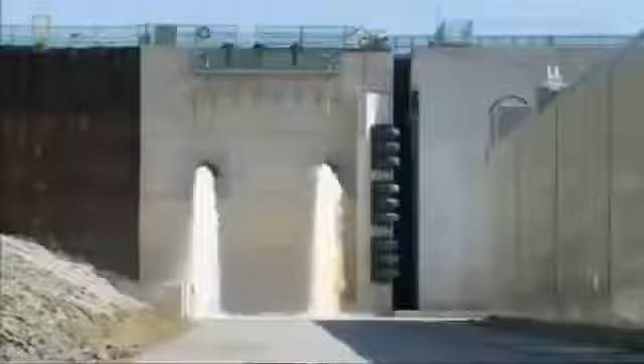Your next vacation may be spent in a paradise you've never heard of. You'll just need a way to get there. Here's the catch. That way has to go underwater. It would become the deepest immersed highway on Earth. Oh, they also have to build a couple of bridges. And did we mention the typhoons?

These tugs are towing a contradiction. A tunnel segment that's both colossal and fragile. Come back. Close. Slow down. A raft of techno breakthroughs and untested results. Bound for a place few know, to entice the world to visit. And even sway the choice for the Olympic Games.

Busan is South Korea's second largest city. 4.2 million people. Bigger than Madrid, closing in on Milan, and as hectic as Manhattan. South Korea is an Asian tiger, and Busan makes it roar. Its skyline will soon include one of the world's tallest buildings. It's the nation's biggest port, and the 5th busiest in the world.

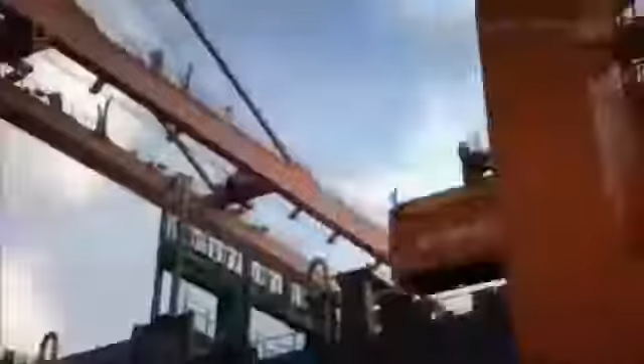Every 3 seconds, they unload a container. It's so busy, they had to build the sprawling Busan New Port. And still, Busan grows. Busan is such a comer, it's bidding for the 2020 Summer Olympics.

But Busan has one big problem, and it's on display here at one of Asia's biggest fish markets. Dozens of vendors cram in here, 14 hours a day, every day of the year. And that's the trouble with Busan. It's so crowded, it's running out of room.

The solution to Busan's problem lies just across Jinhae Bay. Geoje, an island 7 times bigger than Manhattan, but just 1/8 of Manhattan's population. Busan, Geoje. Busan, Geoje. Geoje is a gold mine of development, a potential Korean Riviera, with room for Olympic athletes to hit their stride, and for the Korean tiger to stretch its legs.

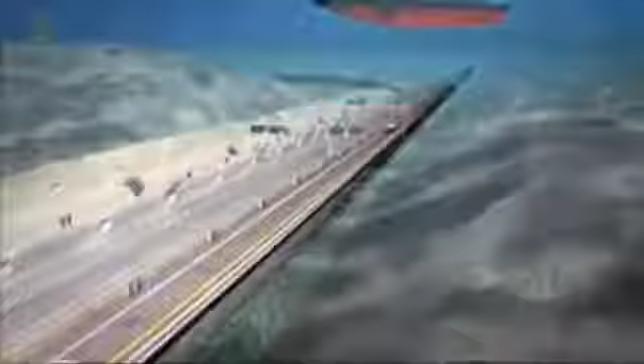Plunging 48 meters below sea level, the link will boast the deepest immersed roadway in the world. The tunnel will be composed of 18 mammoth segments, each as long as 2 football pitches and as heavy as an aircraft carrier. Wide enough to carry 2 lanes of traffic each way, with an access tunnel between.

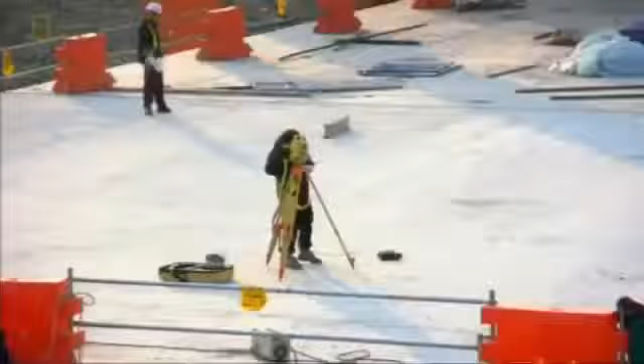That's the concrete reality. Now, here's where it gets dicey. Each segment has to be carefully towed into position, then carefully sunk to the seabed. And all the segments have to align within 35 millimeters, less than a thumb's width. Weather adds its own demands. This site is exposed to the open sea. There are always high waves, and the water is deep as well.

It is wide open to the Northwest Pacific Ocean, so we have extreme exposure conditions for the construction period. So we've got to be ready for whatever that sends us, like big swell waves, strong winds, and even the occasional typhoon. Building a tunnel like none ever seen will take techniques like none ever tried.

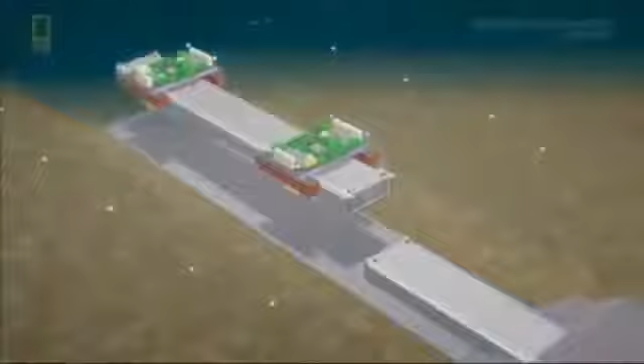Yet the Koreans have never built an immersed tunnel. But this country has. The Dutch have 5 centuries of experience at holding back the sea.

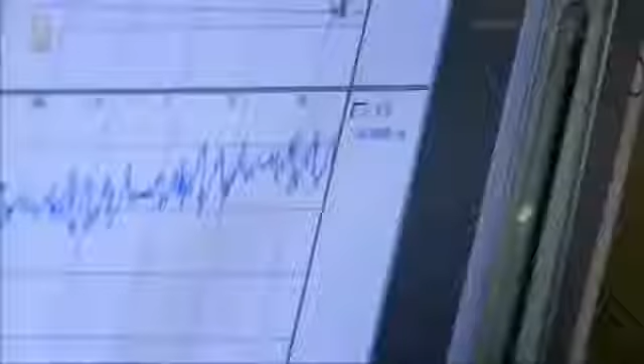The Dutch company had a zest for a challenge, and the confidence that they could solve these problems. And so we were able to trust each other. That's how we ended up working with the Dutch. This is what confidence looks like.

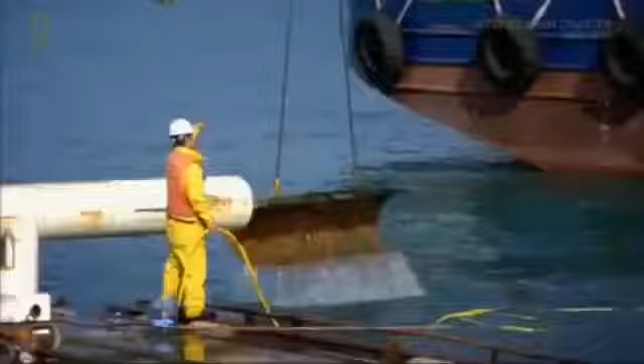Construction begins with the tunnel entrances, one on Gaduk Island, the other near an uninhabited island. From here, engineers will dig down to 12 meters below sea level to meet up with the undersea tunnel segments. But they won't tunnel through the seabed itself. If they did, the gradient would be too steep for driving. Instead, Peter's crew will lay prefabricated tunnel segments on the seabed.

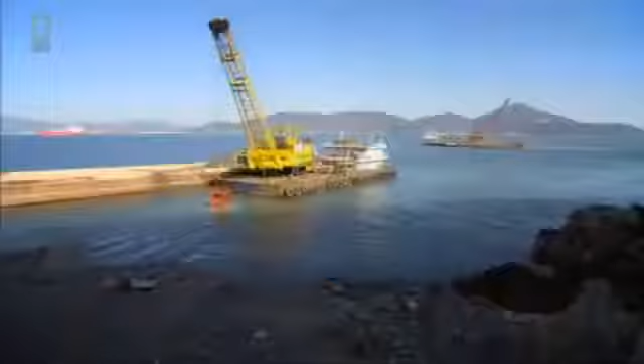First, engineers dredge a trench where the tunnel will rest. To buttress the foundation, they bore concrete columns into the seabed, stopping 3 meters shy of bedrock. The reason? Earthquakes. Avoiding bedrock will give the tunnel crucial flexibility. The segments will rest on a bed of gravel to ensure an even surface.

Because the bed determines the exact height of each tunnel segment, the gravel must be placed with pinpoint accuracy. Later, the entire tunnel will be covered with thousands of tons of crushed rocks to protect it from collisions with ships or anchors.

Because the tunnel segments will be prefabricated, the first challenge is finding land for a construction yard. Not an easy task in Busan. If you look around, there's not a single metre of flat land anywhere that a contractor can use as a base for the construction period.

From the tunnel site, the closest spot lies 35 kilometres away. It's big enough to build up to 5 tunnel segments at a time. Each segment weighs about 48,000 tonnes and is made of 8 subsections, each twice as long as a London bus.

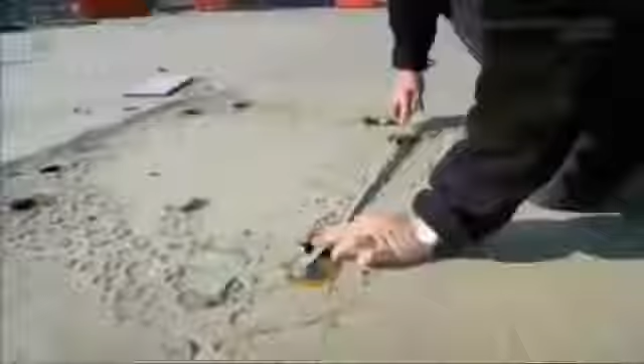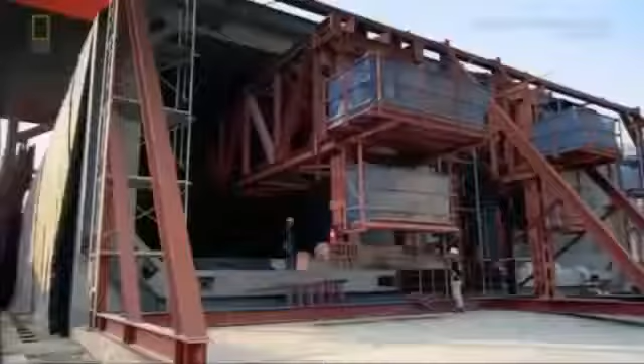Anyone with a basement knows water can penetrate concrete joints, potentially disastrous in an underwater tunnel. But each giant section is cast without a single joint, thanks to Korean ingenuity. We continuously poured full sections from the ground up to the top of the walls to eliminate gaps in the walls.

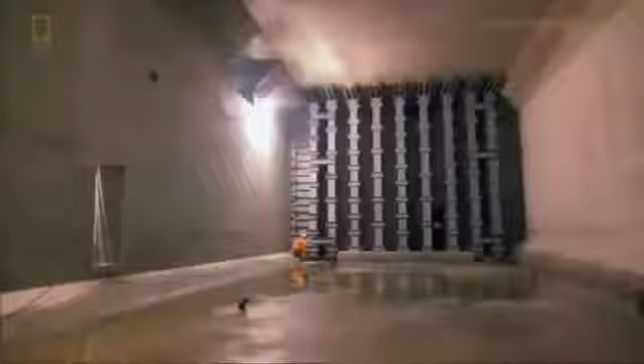A process lasting 24 hours. After casting, the ends are sealed with steel bulkheads, a Dutch innovation best appreciated later on the bottom of Jinhae Bay. The bulkheads are watertight because these babies are about to take a bath.

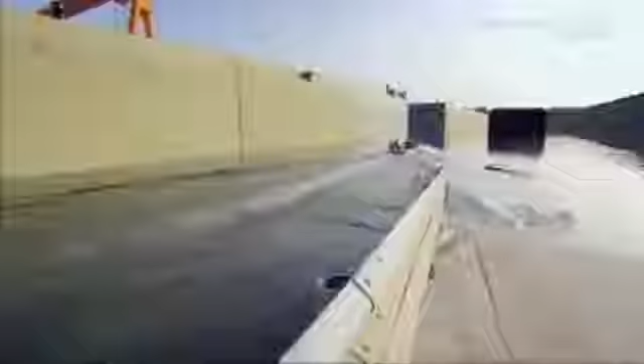Flooding the dry dock will allow them to float the segments out to sea. The inundation of the dock takes approximately 48 hours. During the first phase, we let in water until it reaches the level of the bulkhead door. Then we'll check to see if the bulkheads are leaking. Once all the leaks are repaired, or if there are no leaks, we'll fill up the dock completely. It's enough water to fill 230 Olympic pools.

So how do you prep 48,000 tons of dead weight to float? Inside every tunnel segment, there are 6 ballast tanks, and they're filled with water.

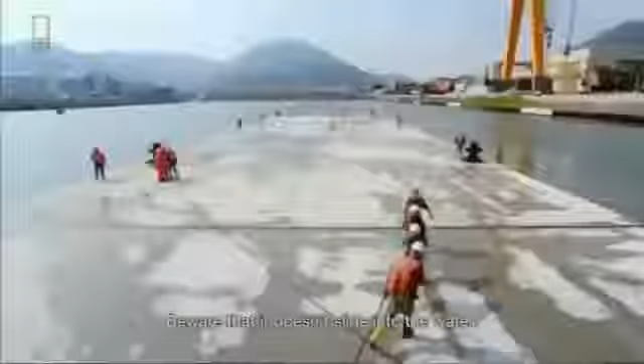With barely 2 meters on each side, there's no room for error.

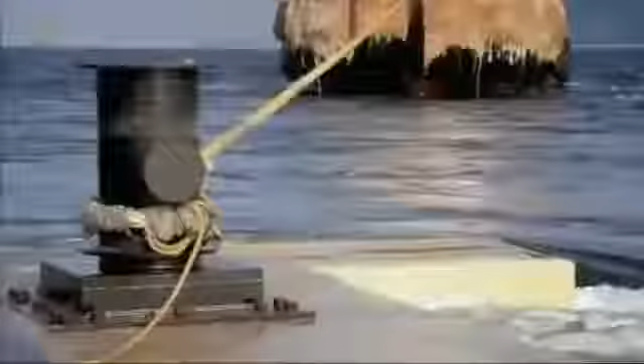Believe it or not, clearing the dry dock was the easy part.

While work continues on the undersea tunnel, the rest of the Busan Geoje fixed link starts to rise: 2 giant bridges, one with 3 pylons, the other with 2.

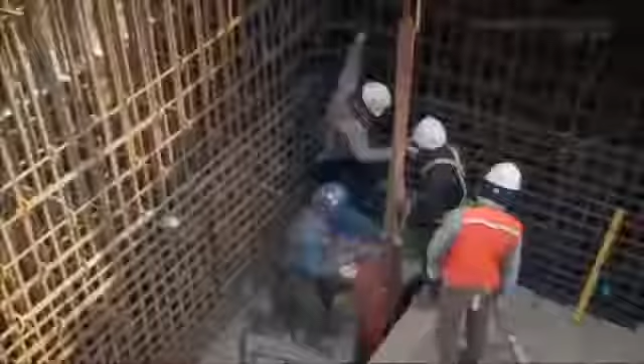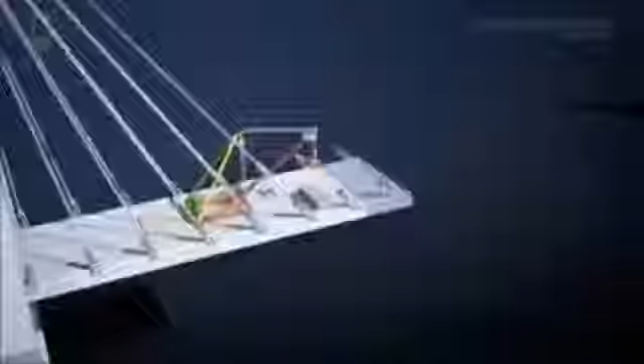At its topmost, the 2-pylon bridge will soar 156 meters above sea level, the height of a 50-story building. The span between the pylons will stretch the length of 5 football pitches, with enough room for the tallest freighters to pass under. Crucial for a city that thrives on shipping for its livelihood.

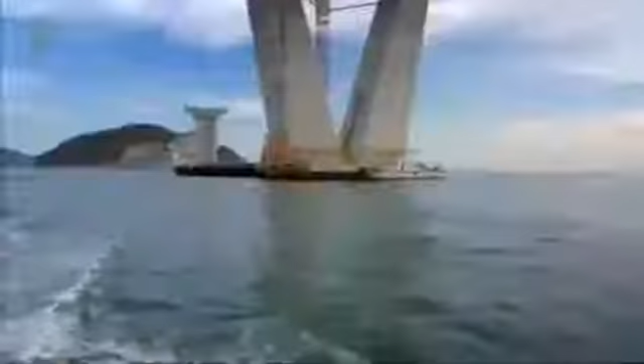The most pleasing aspect of the bridge is also the most daunting: its curved diamond shape. Curved pylons are very difficult to construct, but they're very much in harmony with the surrounding scenery, bearing resemblance to a mother's praying hands and to the wings of seagulls.

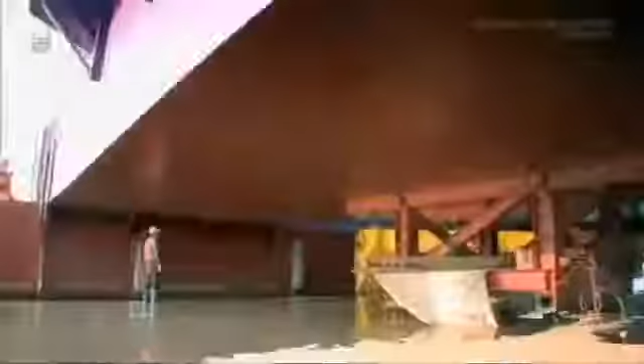35 kilometers away, the first five tunnel segments arrive at a temporary mooring site. From here, they'll travel across Jinhae Bay to their resting place on the sea floor, already leveled and lined with gravel. Pontoons the size of a mansion, Dutch designed, Korean made, are positioned near each end of the tunnel segment. After arrival at the tunnel site, mammoth winches on the pontoons will lower the segment to the seabed. At least, that's the theory, because it's never been done in the open sea.

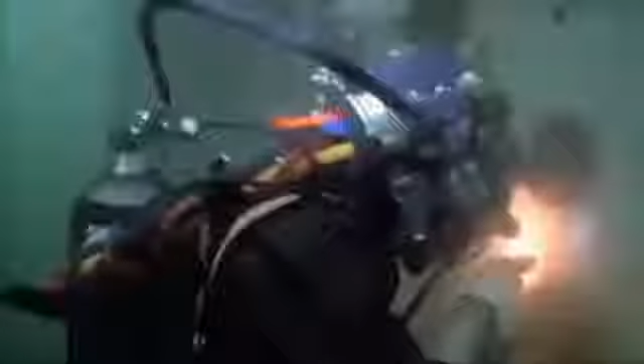A specialist diving team prepares the first tunnel segment for the immersion operation. Divers test connections for data systems and power supplies, standing by, and remove marine growth from the bulkhead. Finally, they install steel wires underneath the tunnel segment, crucial for positioning during immersion. In a good position now, they come up on the wire.

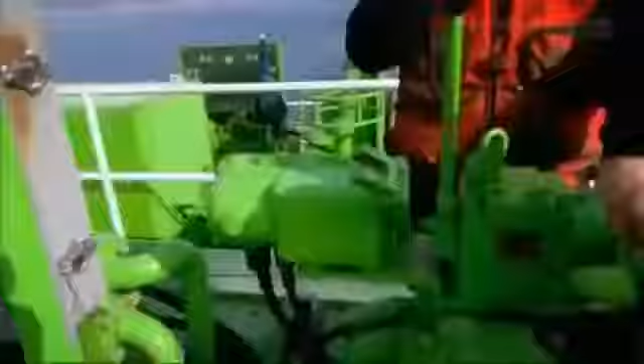Above water, the crew also add a temporary access tower, so workers can enter the segment in case of trouble with the ballast tanks. Every problem has to be anticipated, because if things go south, they won't get a second chance. What we do doesn't have anything to do with luck. We know what's involved, we know how the process works, and we have the feeling we control the whole process. Not quite.

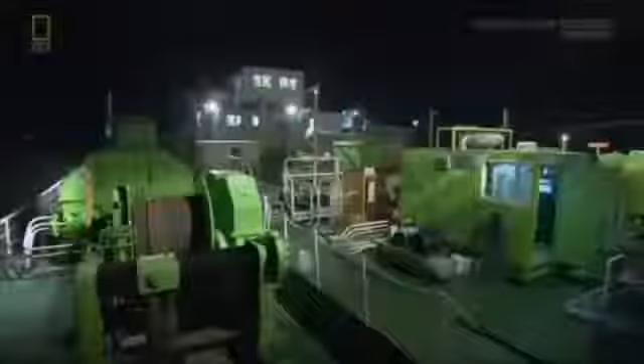Back in Holland, the rest of the immersion team stands by to fly out. In all, 56 men wait for Peter to say go, and he's waiting for a forecast.

When the wind blows from the south, swells roll in from the Pacific. Because the site is situated offshore, they have to deal with waves, and these waves can be pretty fierce. Even swells barely 30 centimeters high pack so much force they could fracture the subsections that form the tunnel segment. Throughout its journey, the segment will be at the mercy of the waves, so the team needs three days of calm seas.

Strukton looked around for a forecaster, but few dared to stick out their neck for such a costly guess. Then a Danish company seized the challenge, coming up with a model to predict waves as small as 10 centimeters, up to five days out. A stunning breakthrough in forecasting.

That means we're able to say tomorrow we can do an immersion, and that means we're able to put people on the plane yesterday, really on a last-minute basis. It takes away a big risk for us and for our client.

We've got the weather, they're all showing the same prediction. The swell still isn't as bad. I would say we have a go. Green light. We'll try, then we'll try, right? Okay, thank you, yes, bye-bye.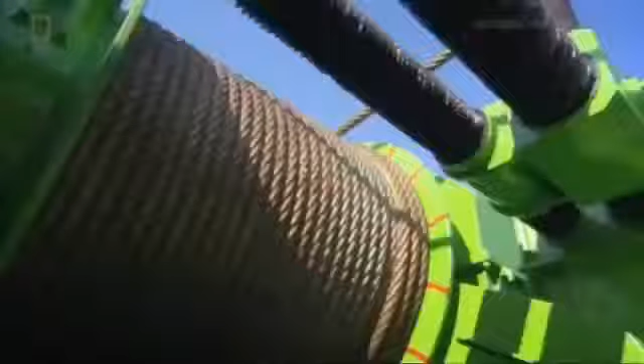Ahead lie 48 hours of tension for the boss. Six months of work ride on steel threads, and a forecaster's guess. Tonight, no one will sleep soundly.

After a cautious voyage at 3 kilometers an hour, the first tunnel segment arrives at Gaduk Island, the starting point of the tunnel. Joining Peter is the elite team fresh from Holland, among the few men on the planet who can do this job.

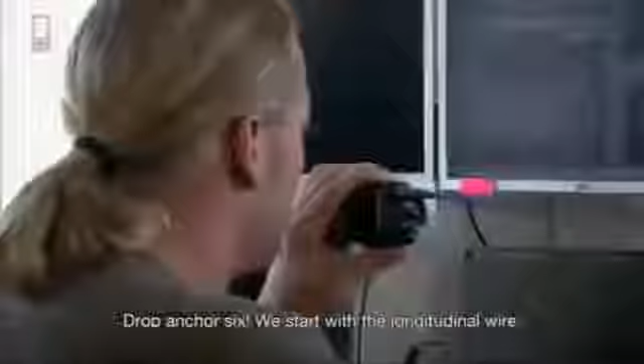But working along shore poses a huge challenge. 48,000 tons have to be maneuvered into a slot with just one meter of clearance underwater on each side. One false move and the segment could get jammed in the rocks. Controlling the segment are 14 steel cables, anchored in the rocks and on the seabed.

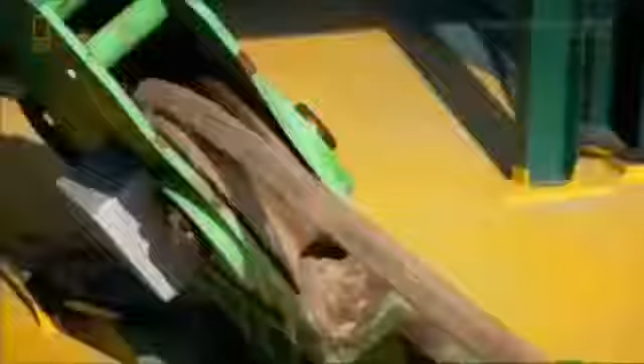Aligning the segment takes painstaking accuracy. Surveyors take readings using a system of prisms and mirrors mounted on the access shaft and the survey tower. It's all new to the Koreans, so it takes time getting used to the technology.

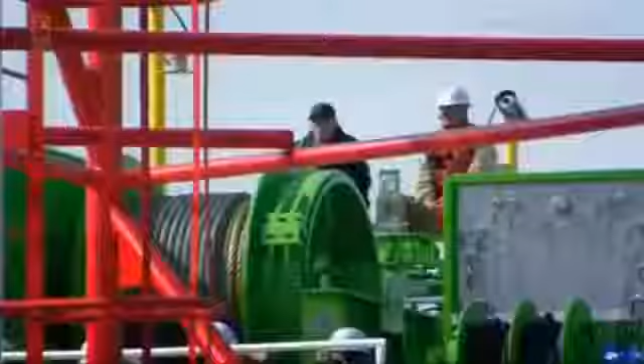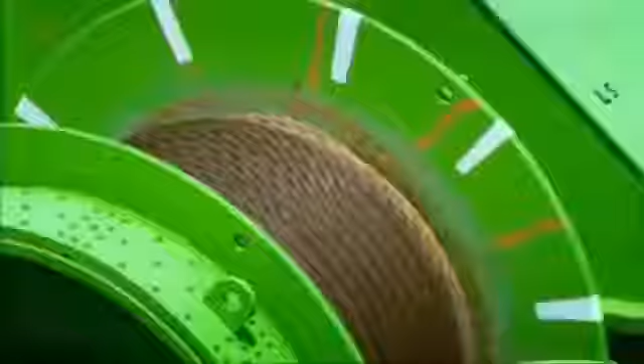The ordeal will take all day and end either with an engineering triumph or a 48,000-ton disaster. With so little clearance and so much at stake, the segment moves at a snail's pace. After a journey of 35 kilometers, it's now just 4 meters from the abutment.

We've worked really hard for a half a year to prepare for this moment. 56 of our people are here to execute this operation. The Koreans are excited and tense because they've never witnessed this. We've done it more often, but still, a very special moment.

Till now, steel plates have protected the leading edge of the segment. Behind them is a component as crucial as it is fragile: a rubber gasket to ensure a watertight connection with the abutment.

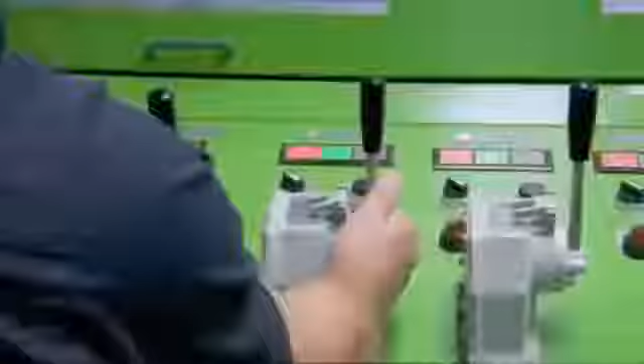Now they're ready to begin the descent. Operated by remote control, the ballast tanks slowly fill. The command post monitors everything via remote control cameras, on the pontoons and inside the tunnel segment.

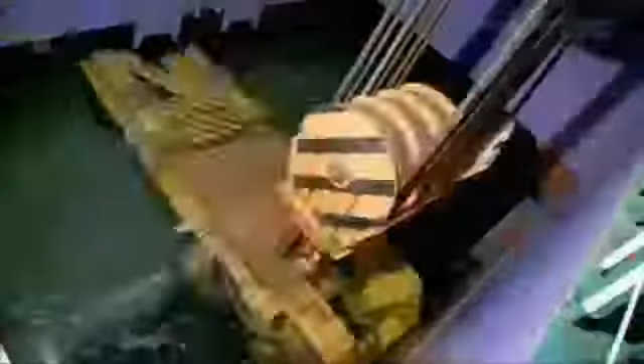7 hours later, touchdown. The segment now rests just 50 centimeters from the abutment, the mouth of the landward tunnel. To close the gap, engineers have installed a pair of powerful hydraulic jacks. Linking the jacks and applying tension closes the gap.

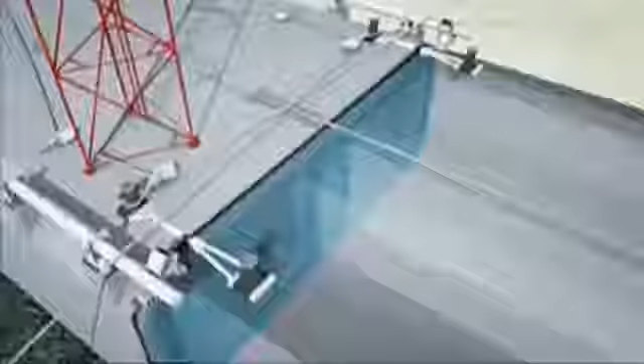The final stage begins from the landward side. A wall of water nearly 3 meters wide separates the segment from the abutment, what they call the immersion joint. Opening this valve will force the water out.

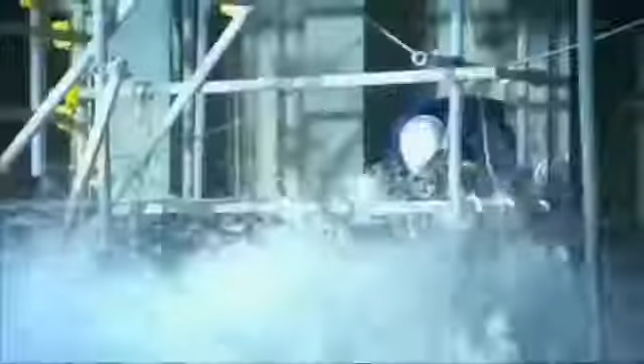As the immersion joint empties, external pressure will further compress the gasket for a watertight seal. The echo from the bulkhead reveals the water level in the joint. With the water drained, they can open the bulkhead door.

But the lock's jammed. You know that he was going to break? Did you know that? Because you took a toolbox with you.

This calls for cruder technology.

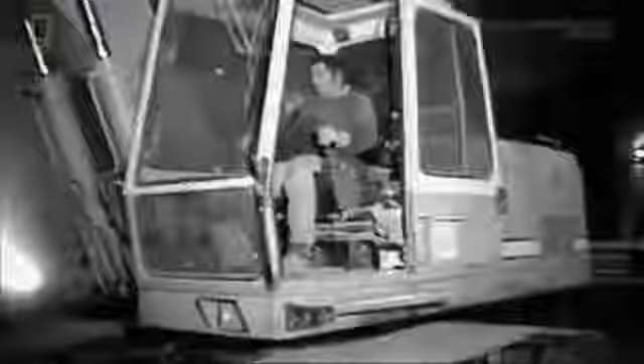All that stands between the crew and the first immersed segment is the steel wall installed back at the dock, and here is why it's so brilliantly simple. On other tunnels, engineers seal the ends of segments with concrete, then knock it out after immersion. But that takes time and creates debris. The modular steel bulkheads are easy to install, easy to remove, and they'll be reused on every segment and eventually recycled. Faster, cheaper and safer. An engineering trifecta.

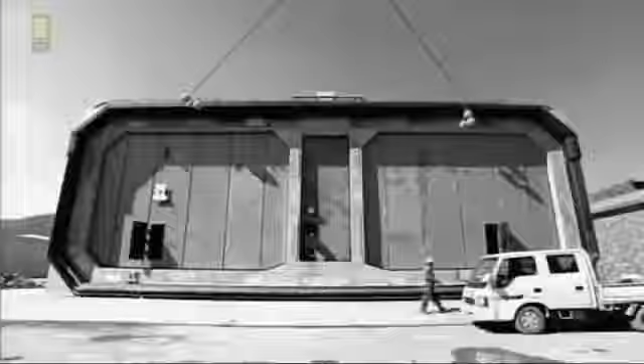Finally, open sesame.

Although we experienced some unexpected things, we were very happy that it was completed successfully in the end. And the feeling of accomplishment was indescribable.

Their marathon operation lasted almost 78 hours. Some have gone 2 days without sleep. One down, 17 to go. And they won't all go smoothly.

Like the Busan tunnel, the bridges advance in segments, but 2 at a time, not 1. It's called balanced cantilever construction. Working outward, steel segments are laid on each side of the pylon to keep the bridge in balance.

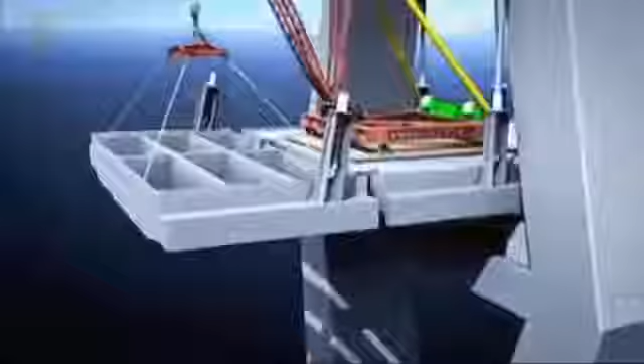Then 2 cables are attached to brace the segments. Once they've done that, the derrick crane then lifts up 6 precast concrete panels and places them onto the steel frame. Then put a final post-tensioning into the cables.

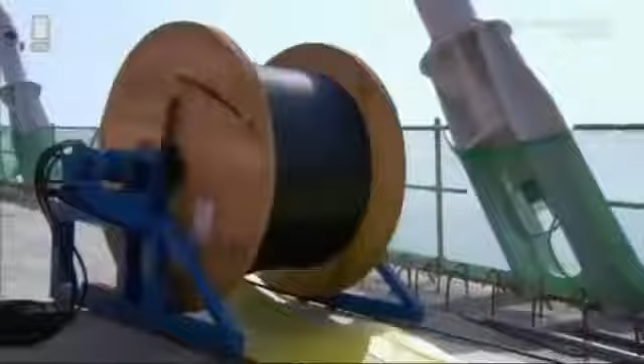And we're ready then to start the whole thing over again.

Back at the tunnel, the team have installed 12 concrete segments. But now they're heading for 48 meters, the deepest water and the hardest challenge.

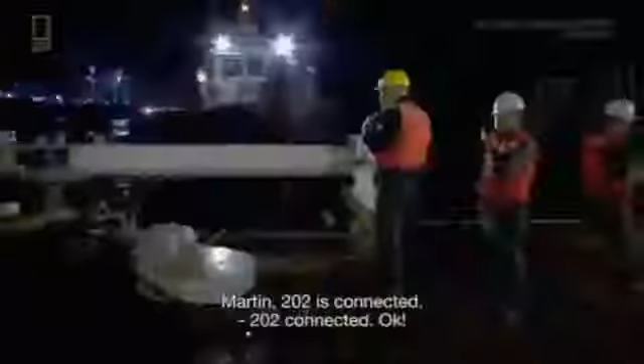New hurdles demand new techniques.

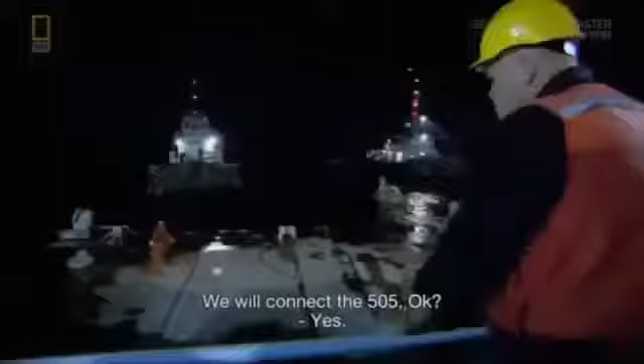The sea floor out here is soft clay, so they need to set anchors that can hold the segment and pontoons fast.

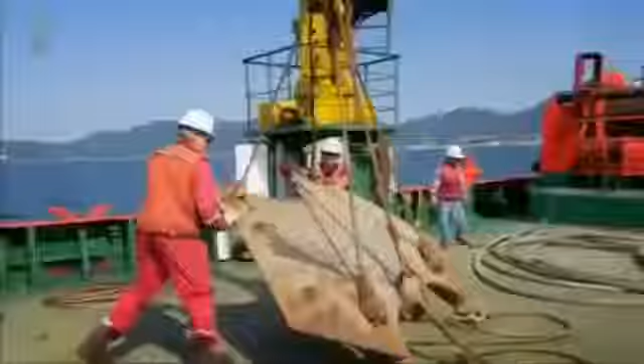Stevmantas, named for their fish-like shape.

They're designed to dig in where other anchors lose their grip. Once segment 13 arrives here, 14 steel cables connected to the anchors will hold it in position.

But once again, deep water raises the stakes. Once the segment hits the bottom, suppose a problem arises with the ballast tanks. Somehow, Peter would need to get the engineers inside.

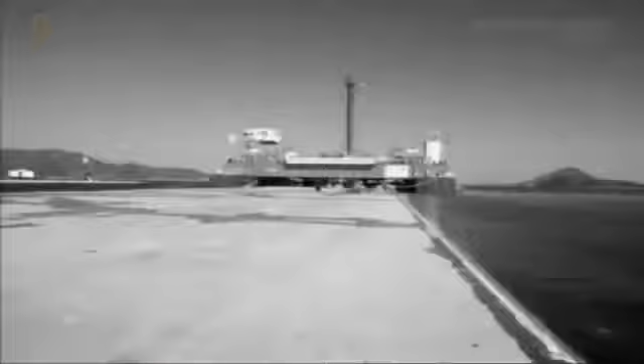On segment 1, they could use an access tower, but not in deep water. The solution is a first in tunnel immersion: a self-propelled diving bell. Purchased in America, the sub was refitted just for this project.

I'm coming down to 15 meters, see if we can get the tunnel on sonar. This is the tunnel element here. That's something probably a bollard on the corner.

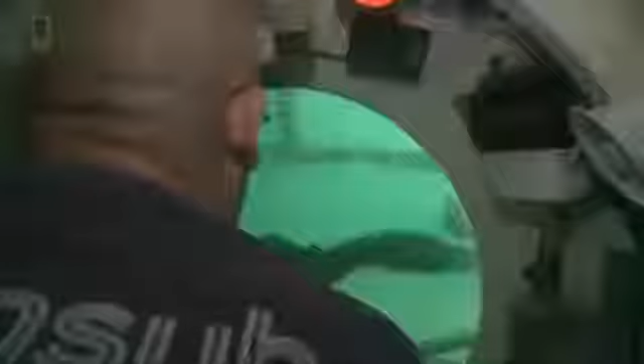With a little boat like this that can go to 300 meters, you've got the concept of a ferry transferring people to the tunnel segment. It's 9 meters long, with room for a pilot, co-pilot, and 5 engineers. It can dock on a landing tower on the segment for watertight access to the tunnel.

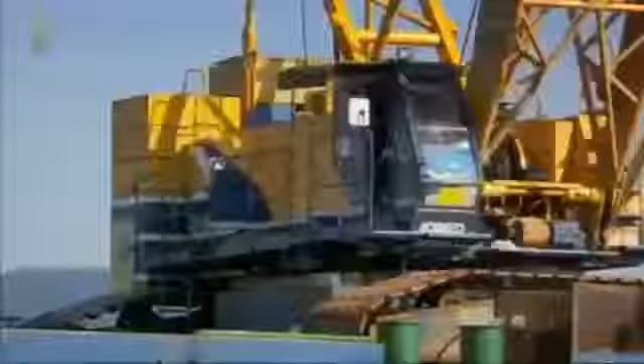Deep water poses another problem. Monitoring the position of the segment as it's lowered, because one misalignment would be disastrous. To calibrate the position of the first segment, surveyors took readings from prisms mounted on the access tower. But remember, there's no access tower here. So once more, the Dutch devise a smart, simple solution. It's named for what it is.

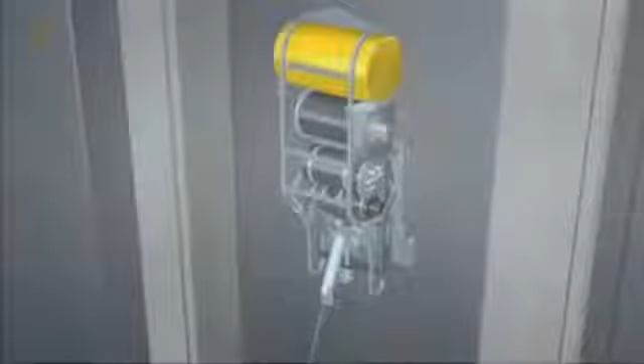A taut wire. One end attaches to the leading edge of the segment to be immersed. The other end attaches to the previous segment. The taut wire ensures the connection stays under high tension. Positioning the device is a delicate operation. This custom-made model is the only one in existence. Breaking it is not an option.

When this segment descends, a computer will record the length and angle of the wire, allowing the team to monitor the segment's position. The taut wire is now under high tension between this segment and the previous one. And as the segment descends, the wire automatically retracts and becomes shorter. So that provides us with exact positioning data.

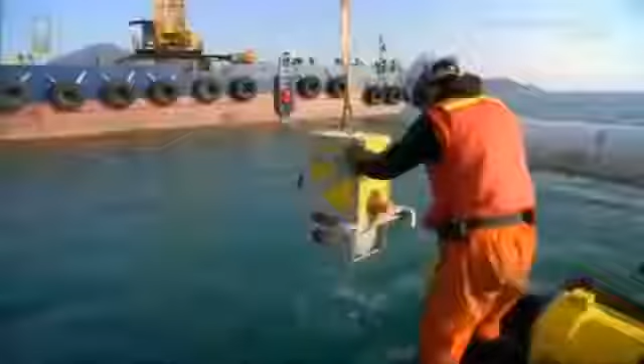To fine-tune the position of the segment on the seabed, 4 of these sensors are attached, one on each corner of the bulkhead. Another custom innovation for this project. And wait till you see how accurate they are. The whole operation is remote controlled from the command unit on the pontoon. With one click, they start filling the ballast tanks.

You can feel the tension building up now. And then we all have one question. Can we do it again? Can we get it in position? It's the same tunnel, but it's farther away from the coast. It's deeper, the weather, everything. So many aspects make it different every time, so you have to stay alert.

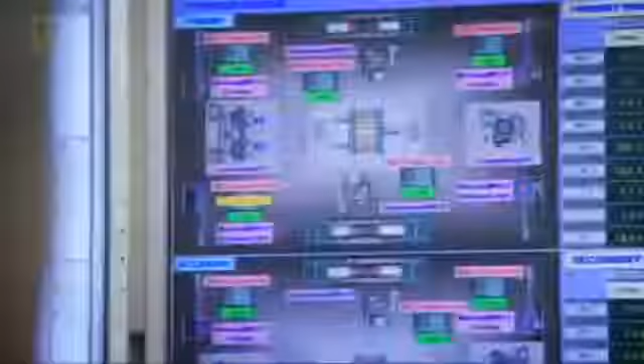All the data feeds into Peter's computer and refreshes the position of the segment every second. This is the tunnel where we have to go to. The green one is the final position, and this is where it is now. So you can see it's just below sea level.

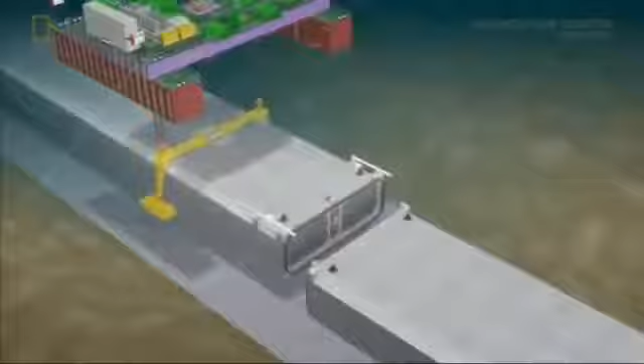At this stage, where the tunnel is just a few meters underwater, there's no problem. We can still move in any direction. Nothing can hit it. But when we're approaching the segment that's already on the bottom, then I have very little clearance, so the steps I make will be a lot smaller.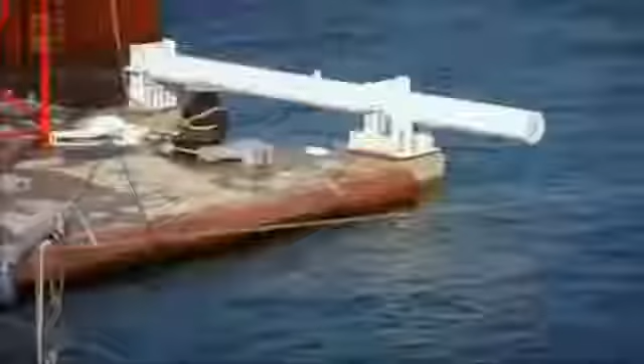It takes 9 hours to descend 48 meters, just 9 centimeters a minute. The first step in joining the segments poses another challenge and another solution. The moment a tunnel segment approaches the one ahead of it, it's moving because of the swell. So we install 2 guide beams on the top end of the segment. Another simple but elegant solution.

The moment we pull them closer together, the guide beams become less flexible. The movement diminishes until the segment is motionless. With only 50 centimeters separating the segments, and in near zero visibility, a diver connects the hydraulic jacks. The segments seem aligned, yet the slightest error on this end will translate into a big mistake at the other. But the Dutch don't miss a trick.

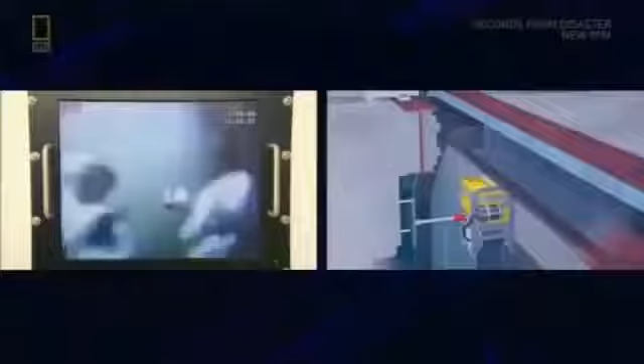The 4 remote-controlled sensors on the bulkhead now deploy. They measure the position of the segment within 1 millimeter, the width of a guitar string, and relay the data back to the command center. Peter needs to shift 48,000 tons of concrete, 20 centimeters to the right. Even on calm days, the swell is so heavy and the segment is so long, stability is a problem.

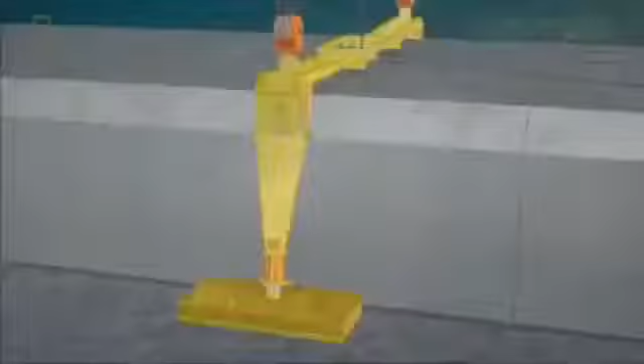The solution? The External Positioning System, or EPS. Yet another Dutch invention based on a simple idea. A pair of hydraulic legs and extendable feet to hold, lift and move the segment. Connecting each pair of legs are 4 steel cables, already installed back at the mooring site. Braced on its robot legs, the EPS laterally aligns the segment into its correct position. Now, the jacks are tightened by remote control, compressing the rubber gasket.

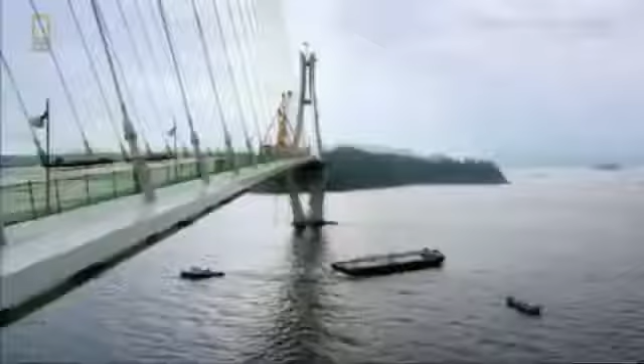Done. One more segment, complete. Like the tunnel, the bridges approach the final stages. Before the 2-pylon bridge can accept its last section, engineers have to perform a stretching exercise, as tiny as it is powerful. Both pylons have to be pulled back about 7 centimeters to create enough space for the key section to be placed.

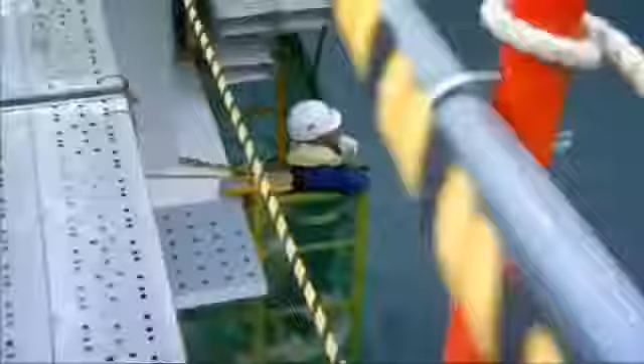Once the tension is released, the final section will have a tight fit. After 6 years, they must be eager to finish. But just like the tunnel crew, they have to move in baby steps. Because this baby is a giant.

A few kilometers away, Peter's crew prepares to install their last segment. Just like the first segment, number 18 has to be maneuvered between rocks. As before, they run some of the anchor lines from the pontoons to the rocks. Because it's so close to the island, it's very difficult to install the immersion wires. Connecting them isn't easy by any means. It's not just a matter of simply pulling them in place.

With all cables attached, they can start maneuvering the segment into place. Because this segment is extremely heavy, we can't afford even a small mistake. Light contact can cause huge damage to the segment, and that kind of damage can set back the entire project. After 3 years, they'll open the last tunnel segment tonight, if all goes well.

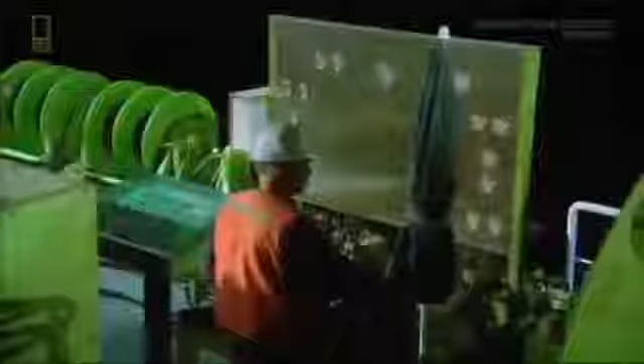The segment hits the bottom, but there's trouble. One end is sitting 28 centimeters too high. We're now trying to figure out what the cause is. We don't know yet. It's a major problem at the moment. We're taking about half an hour to go through all the steps so that we don't miss anything. And then I'll inform you about the situation.

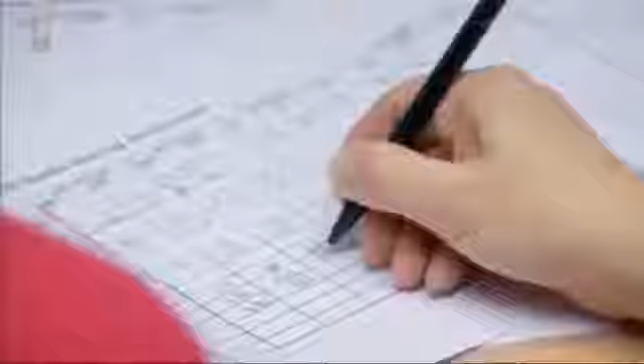The gravel foundation under one of the EPS feet is overbuilt, so they'll have to remove the foot. And the grand opening will have to wait one more day. After final adjustments, the last tunnel segment now sits squarely on the sea floor. All that's left is entering the tunnel to seal the joint with the final segment. They'll enter via the tunnel entrance on Gadeok Island. It's the last time Peter will make this trip.

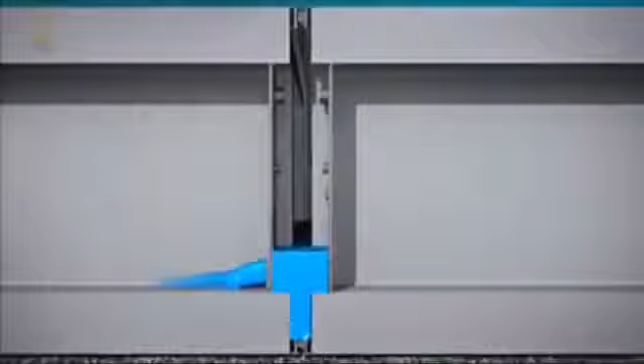They always celebrate this step, but today is the grand finale. Once complete strangers, now firm friends, and soon to go their own way. The end of their long journey lies behind this bulkhead door, and the honor of opening it falls to Peter.

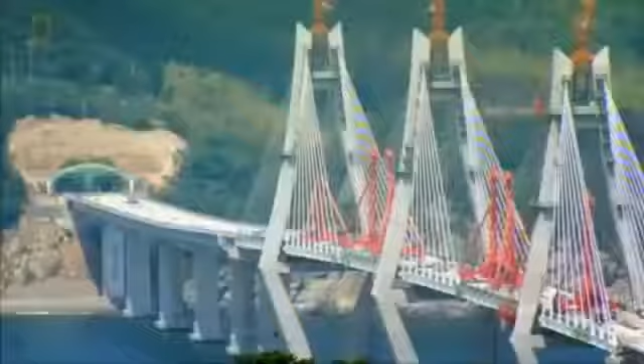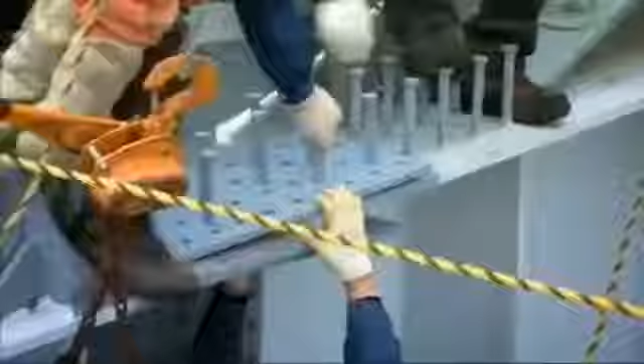Back at the bridge, the final section is lifted into place. Once the tension on the towers is released, the whole structure will be locked in place. With the bridge complete, all that remains is opening the final segment of the tunnel. Last inspection.

Really extremely proud that we did it, and happy, of course. Happy for the whole team. It's just great. After all this time and after a difficult operation, we did it. Very emotional, yes. Fits the moment. And proud. So proud. Yeah. Come back.

For Peter's team, the tunnel marks another success on a stellar resume. For the Koreans, it's a chance to join the Dutch on the world stage. Actually, this was the first immersion tunnel project in Korea. And we developed lots of new equipment and we trained lots of engineers, and eventually we could finish in time and everything is happy. This isn't just a shortcut to an island. It's a path to the future.